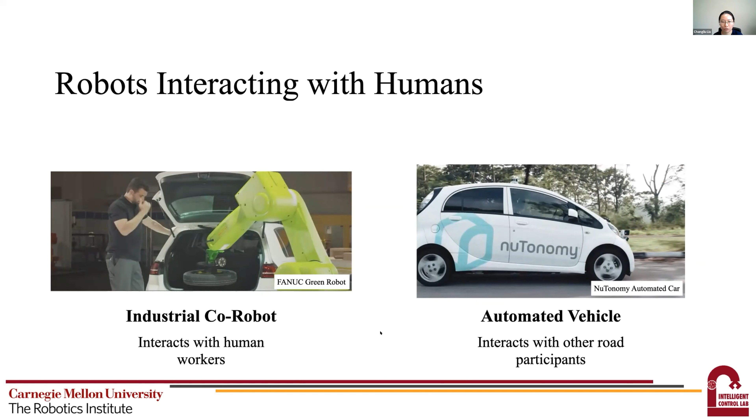There is one thing in common: they're all safety critical, and because they interact with humans, who are highly unpredictable, we need to deal with a lot of uncertainties while generating safe control. In today's talk, I will mainly discuss two of our recent works to ensure safety critical control. The work is based on the energy function based control idea, which has been widely used in control theory to prove system stability or system reachability.

The idea is also very intuitive. If you want your system to achieve a certain goal, you put the goal states at low energy values. Then you design your closed loop control system to be energy dissipating. Eventually, if you let your system evolve automatically, it will converge to the low energy state, which is the desired control objective. We can see an animation here. So eventually you will go to the low energy state.

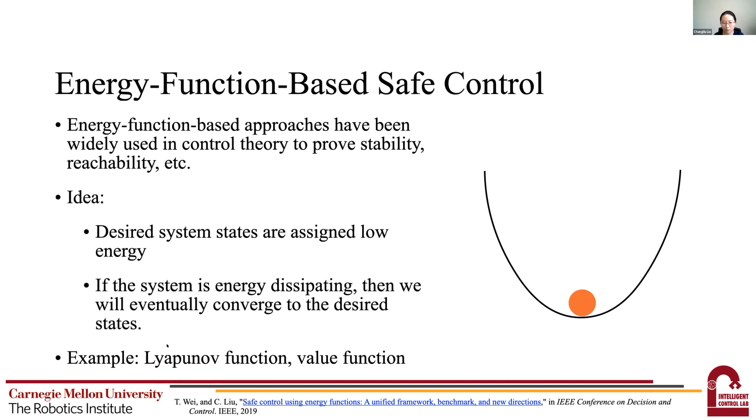In control theory, these energy functions are called Lyapunov functions. In reinforcement learning, value functions sometimes work similarly. How can we use this energy function-based idea to design safe control? That is also straightforward. We can assign low energies to the safe states and high energies to the unsafe states. Then we design our closed loop control system to be energy dissipating, and we achieve safe control.

In particular, we want to solve two major problems in safe control. By the way, the safety specification considered in this talk will be a constraint on the state space. That is, we need the system state to be constrained to some subset of the whole state space. This subset is called the safe set, denoted as XS here.

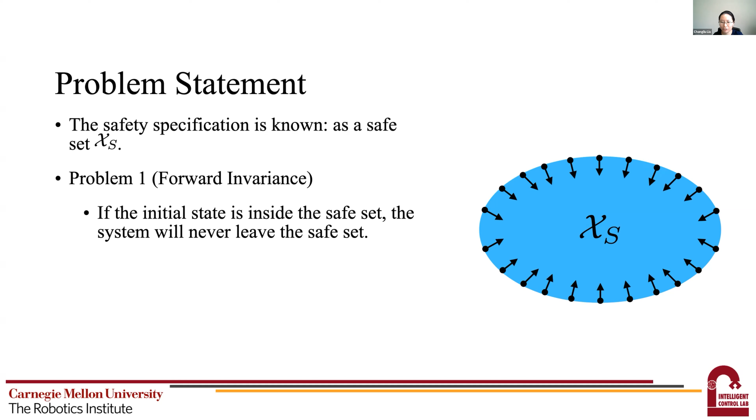The first problem we're trying to solve is called forward invariance. That means if you start from this blue region, you should always stay in this blue region. So we should make the boundary of the safe set repulsive. Whenever you're touching the boundary, there will be some force to push you back.

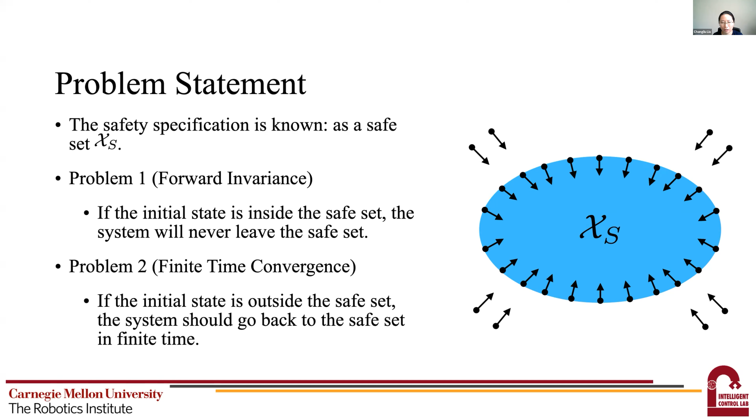The second problem is called finite time convergence. That is, if you start outside the safe set, your control should pull you back to the safe set in a finite amount of time. Both objectives can be addressed using an energy function-based approach. Before we dive into the mathematical details, let's first look at one example in human-robot collaboration, and I will discuss how we abstract out those safe sets and how we do the control here.

So the left figure is showing the real-world situation with one industrial robot collaborating with one human. So for this kind of collaboration, we require that the robot should not collide with the human.

And in order to compute this relative distance between human and robot, we abstract out the real situation into this computation model. In this computation model, we use capsules to wrap each link of the robot, as well as each link on the human body. And also the radius of those capsules are design parameters. So for example, we can assign large radius for vulnerable parts on human body, for example, head and trunks. And then with those capsules, we can greatly simplify the distance computation.

And then with that distance computation, we can define our safe set. That is, the safe set contains the human state and the robot state that satisfy the following distance constraint. That is, any area occupied by the robot capsules should be at least gamma distance away from the area occupied by the human capsules. Yeah, and those capsules are denoted as CR and CH.

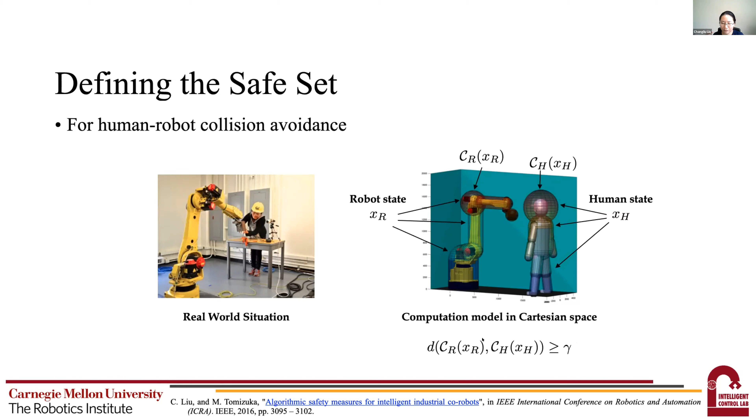And here we provide a very simple illustration in 2D where the horizontal axis represents the robot state, the vertical axis represents the human state. And suppose at current time step our system lies in this point, as human state is here and the robot state is here, then that means we are safe because we are in a blue safe region. But if we anticipate that the human will take a move, go into the unsafe area, then the robot should take a motion to pull the system back.

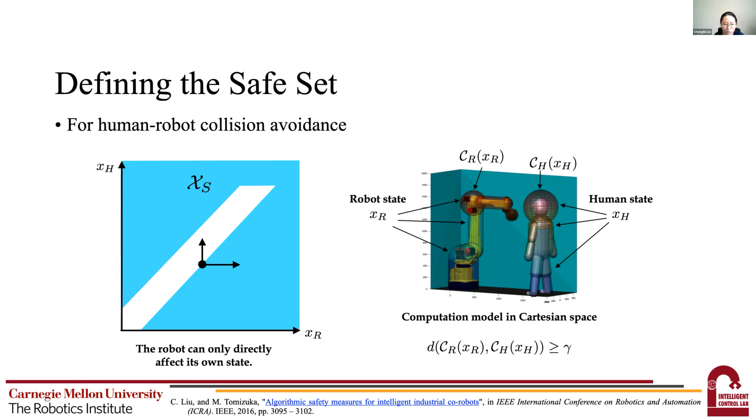And to automate this process, we can introduce this energy function-based idea. That is to define an energy function on top of the system state space, such that the sublevel set of this energy function is the safe set, as shown in the figure here. And then any control input that combines the human control and the robot control, any control input to change the system state will result in a vector flow on the surface of this energy function.

So then we can judge whether this control is safe or not using how this control is changing the value of the energy function. So for example, if the control is driving the energy function above the level set, then it's an unsafe control. And if the control is driving the energy function back into the safe set, then it's a safe control. And then we can use this to verify whether a control is safe and also to design a safe control law.

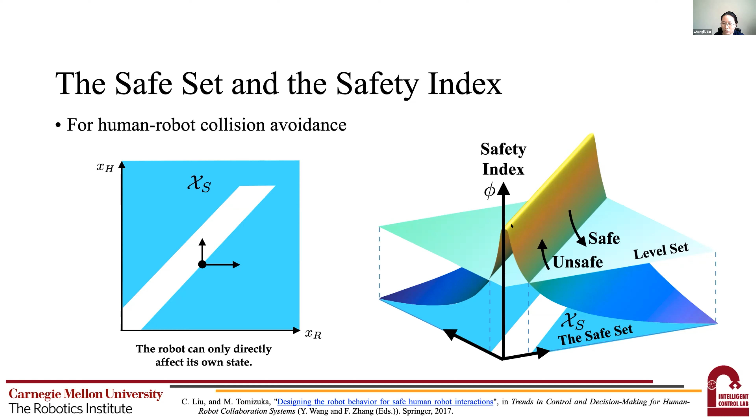And here, because we're focused on safety, we call this energy function for safety the safety index. And then we can use this safety index to derive the safe control. Suppose our system dynamics can be written as this ODE, which is affine in control. That means the control term does not enter the nonlinearity. And we have this x dot equal to f(x) plus g(x)u.

And then we can compute how the control will change the safety index, which is phi dot equals L_f phi plus L_g phi multiplying u, where L_g phi is the Lie derivative. And here one more thing to mention is that if we're considering the human robot system, then this ODE should contain both human dynamics and the robot dynamics. But this control u is only the robot control input.

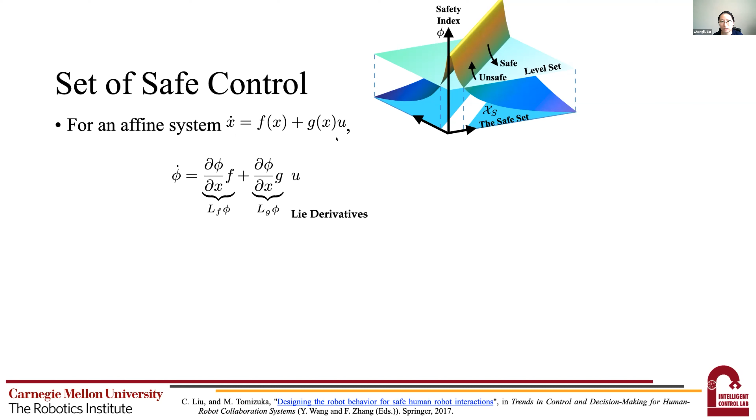And as we said earlier, in order to make sure our control is safe, we need to add some constraints on phi dot, on how it will evolve throughout time. And then this constraint on phi dot can be translated into a constraint on our control u using this relationship, and that depends on the system dynamics. So for example, if we want phi dot to be smaller than some negative eta, and this eta can be a function that depends on phi, then our control u needs to satisfy this half space constraint. And we call this half space constraint the set of safe control.

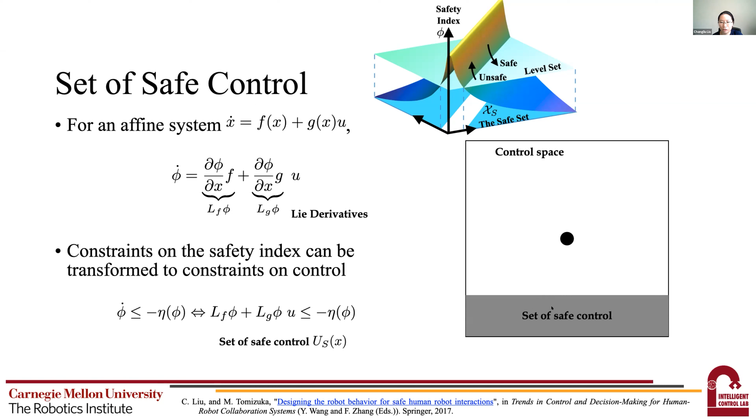And if we illustrate this constraint in a control space, it is something like this shaded area. And why it is a half space constraint is mainly because we assume the system dynamics is affine in control. If it's not affine in control, then we won't have this good property. And since we have this good property, we can use this half space constraint to modify any nominal controller, which may generate unsafe control input. And this modification can be easily done by adding the safety constraint as a supervisory loop to any nominal controller.

This nominal controller can be any like PID controller, LQR controller, MPC controller, or any reinforcement learning controller, which generates a reference control input UR. Then our safety controller will monitor the output of this reference control.

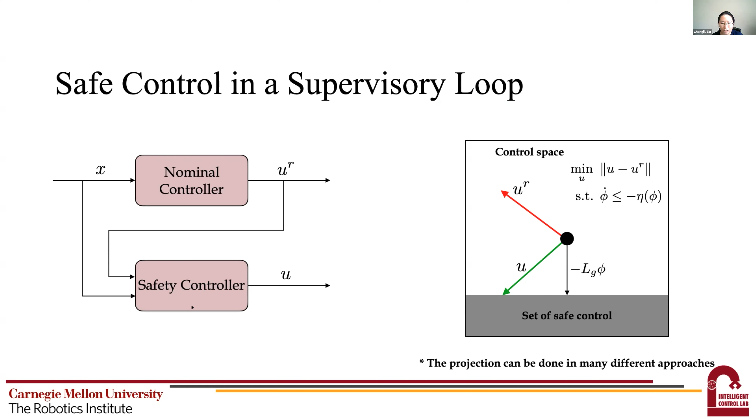And then always, if it does not belong to the set of safe control, we'll always try to project it back to the set of safe control. And using this kind of strategy, we can guarantee that the system will always stay safe. And we have applied this kind of method in a wide variety of systems. And here I'm showing one application on industrial robots.

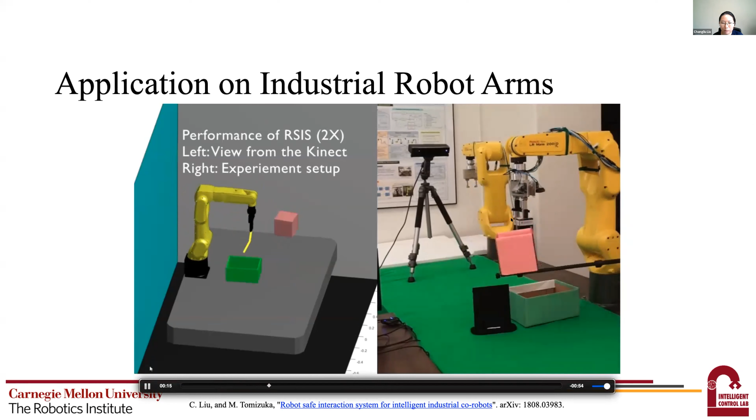And in this video here, we're using safe control to wrap a long-term planner in order for the robot to safely interact with this pink obstacle while still finishing its task by placing this black workpiece into this green box.

So the safety controller is actively monitoring the reference trajectory, this yellow trajectory generated by a long-term planner, which updates at around 1 Hertz. And while the long-term planner is generating a new plan, the safety controller will try to modify this robot trajectory if it detects that the obstacle changes location, which makes the original long-term plan no longer safe. As we can see, this is very effective in guaranteeing real-time safety.

And this safety controller in this case runs at 1000 Hertz because it's basically just solving a quadratic programming, which projects the nominal control from the long-term plan to the set of safe control. So far, everything is good and works perfectly. But that actually depends on a very, very strong assumption. That is, we have a very good system model.

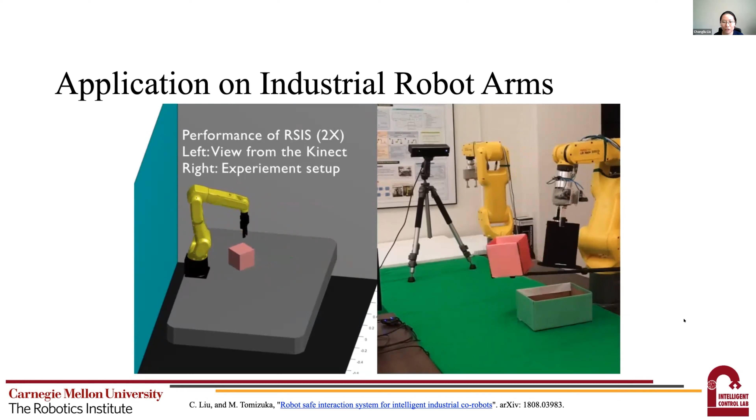But in a lot of cases, we don't have a good system model, especially if the robot is trying to learn its own dynamics and learn how to control by interacting with the world. Then how can we deal with this case? How can we deal with those cases where we either have no model or only a black box model?

So here, to simplify the problem a little bit, we assume that we have a neural network dynamic model, which can be learned offline. And this neural network dynamic model may no longer be control affine. So the approaches we discussed earlier do not apply. And how can we design new computational methods to guarantee safe control for these kinds of models is one challenge I will talk about today.

And the other thing is, during the human-robot interaction, the robot needs to properly predict the human behavior. And the human model is also something the robot needs to learn. But due to the diversity of human behaviors, how can we ensure that our learned human models are general enough to different individuals and different tasks? That is also one thing we need to address.

Okay, so we'll start with the first question. How can we do safe control if we only have a black box model? As shown here, which is assumed to be x dot equals f(x, u). And as a result, we can see that phi dot is also no longer a linear function of u. Now it depends non-linearly on u through this relationship.

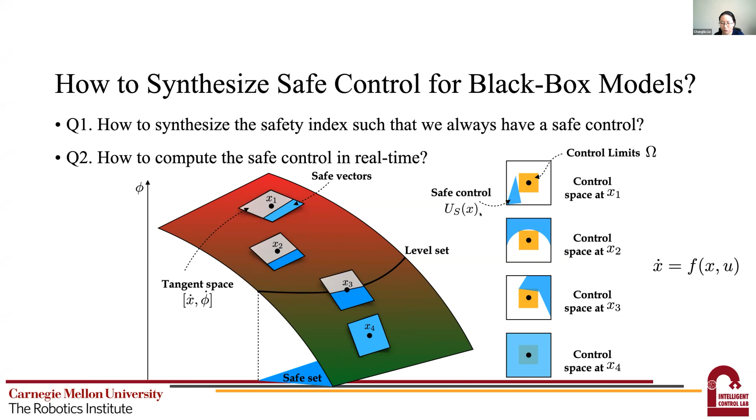For example, this kind of mathematical form can also encode adversarial attack problems on image classification networks. In those problems, people want to find the smallest perturbation to an existing image, suppose it's U_r, such that the label of the image will change. And that can be encoded as an output constraint, and that output constraint should go through the neural network. With this understanding, how about we just borrow the tools in the neural verification domain to solve our problem in safe control? Before that, let's do a quick review of the tools in the neural verification domain to solve this kind of adversarial bound problem.

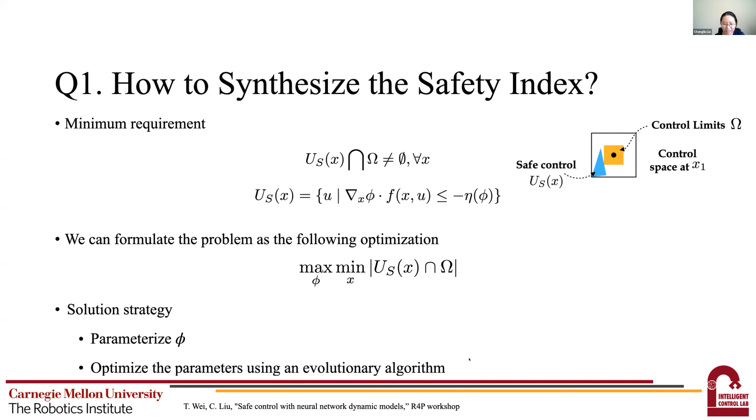In order to achieve that, we can formulate the following minimax problem. That is, we try to find the possible safety index phi that will maximize the minimum area of the feasible safe control. This minimax problem can also be solved very efficiently if we properly parameterize the safety index phi and solve this optimization using an evolutionary method. For details, my student Tianhao just presented this paper in the poster session. Here I'm going to use his example to explain a little more about how everything is done.

He used a second order vehicle model encoded in a neural network to perform this testing. In this example, we require the vehicle to avoid this obstacle. So the safety requirement is that the distance between the vehicle and the obstacle should always be greater than or equal to a minimum distance threshold. And then we can parameterize the safety index in the following form.

The reason why we can parameterize it that way is because it is proved in our previous paper that as long as we can find a non-empty feasible safe control, then the set phi 0 smaller than 0 and phi smaller than 0 is always forward invariant. That means if we start from this set, we will never leave this set.

And the reason why we cannot directly use the original phi 0 is because on the boundary of phi 0, there are some points that will inevitably fail. For example, if we are on the boundary of phi 0, that is, the distance between the vehicle and the obstacle is exactly d min, while the vehicle has some relative velocity towards the obstacle. Since the vehicle is second order controlled, we cannot immediately stop this vehicle. So then the failure is inevitable.

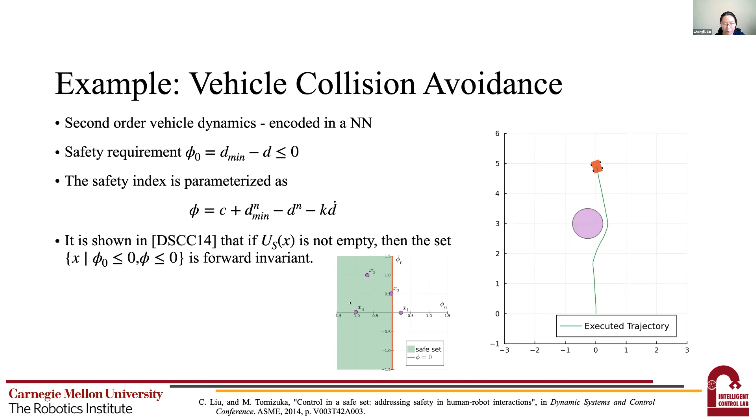Okay, let's see how the learning approach can help us optimize the parameters in this newly designed phi. To illustrate the learning, we introduce this phase graph where the horizontal axis is phi 0 and the vertical axis is the derivative of phi 0. Originally, our safe constraint is the left half space. But as I said earlier, this original phi 0 is not a qualified safety index because for x2 here, there does not exist any safe control, because in x2, its distance is on the boundary and there's a huge relative velocity from the vehicle towards the obstacle.

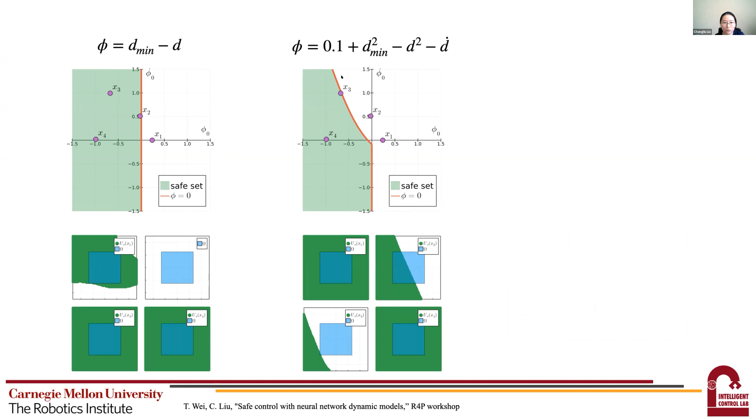Then after some optimization, we exclude this x2 from our safe region, and we get a boundary like this. In this case, all the states now have safe control. And if we optimize it further, we'll have a larger area for the feasible safe control. If we use that learned safety index and then do the real-time safe control using the mixed integer encoding, then we can get those safe trajectories.

This approach demonstrates that even with black box models, we can successfully do safe control using the energy function-based idea. Although there's a limitation: the computation speed is also a constraining point if the neural network is very big. So we still need to speed up the computation efficiency for those neural verification methods. Okay, so that's the first challenge and how we address it.

Then the second challenge is how we can efficiently learn human models so that they can generalize to different individuals and different tasks. The reason why we need a good human model is because those human models will generate uncertainties, and we need to incorporate those uncertainties in the safe control. If there are larger uncertainties, then our safe region will be smaller and the robot needs to generate a larger detour. Our hope is that we can learn good models such that the uncertainty range is small, so we can do safe control non-conservatively.

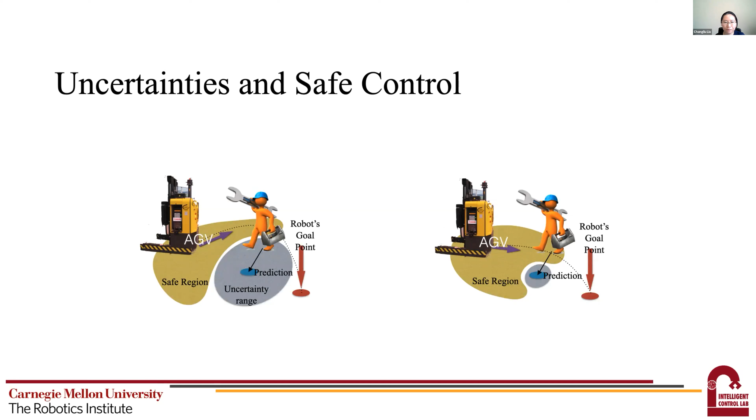And how do we do the human model learning and human prediction? The idea is we first get,

Oh, I see a question. So should I address the question? We can address the questions at the end. Yeah, you can keep going.

Okay, great. So the human prediction pipeline will first collect a bunch of human data and then throw the data into some machine learning methods, which will produce our prediction model. Then in real time, we take the real-time human motion and use the prediction model to predict the future motion. The biggest challenge in this pipeline is that there might be distribution shift between the offline collected data and the online measurement. How to deal with the distribution shift is the key challenge.

This distribution shift may be that we collect data for person A and then test it on person B, or person A is doing task A, but then in real time, person A is now doing task B. These all create a significant distribution shift. In order to deal with this kind of distribution shift, we introduce two methods. First is to do online adaptation. The second is to do data augmentation offline. Online adaptation is very helpful in our research to help minimize the prediction error and also minimize the uncertainty.

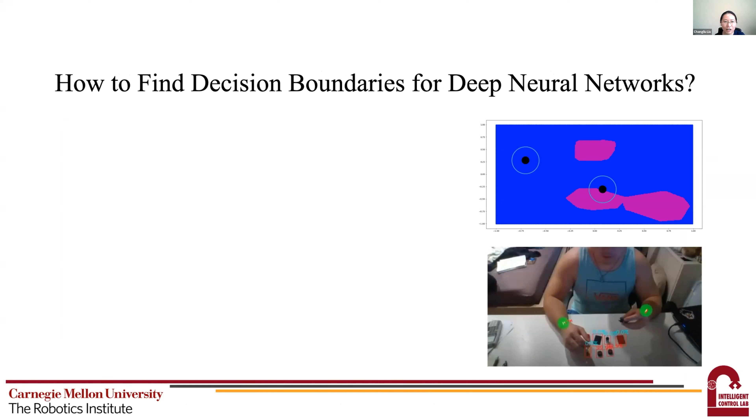Okay, so this idea is very nice, but practically, how can we find the decision boundaries for deep neural networks? It's still a very challenging question. And this is equivalent to doing the following test. That is, for any current data point we have, does its neighborhood have any point that generates a different label? And if it does, what are those data points and can we find them very efficiently?

So in the real application, for example here, what we do is we try to perturb the human trajectory within a certain range and see if that perturbed human trajectory will generate a different intention label. And back to the simple 2D problem, what we do is for every data point, draw a ball and check if the color changes inside the ball. If it changes, then we add the closest point where the color changes. And we can do this efficiently using the neural verification methods that we introduced earlier.

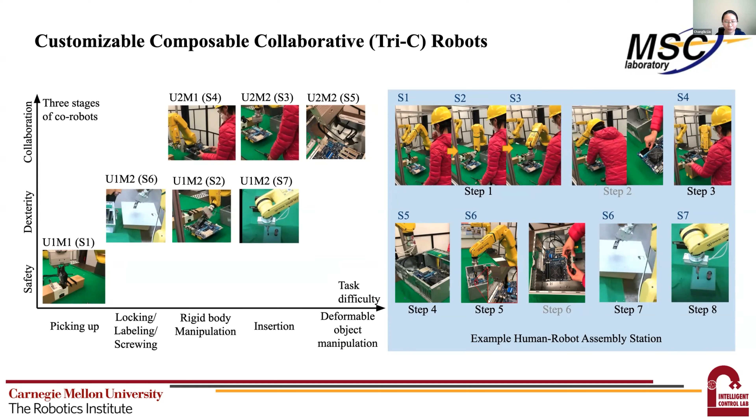So for example, instead of just handing over, it can perform some cable assembly, perform some insertion. And we believe that will greatly improve the helpfulness of those human-robot interaction and collaboration.